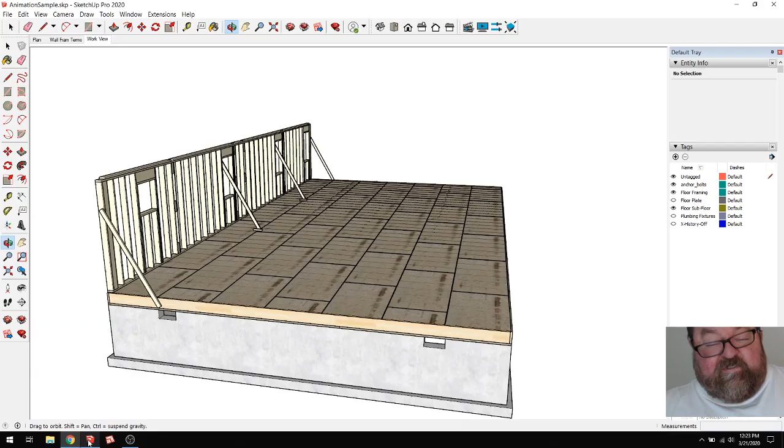So what I'm going to do is go into SketchUp, and this is like a little sample house I had started working on for our apprentices on artisanschoolofconstruction.com, in case you didn't know.

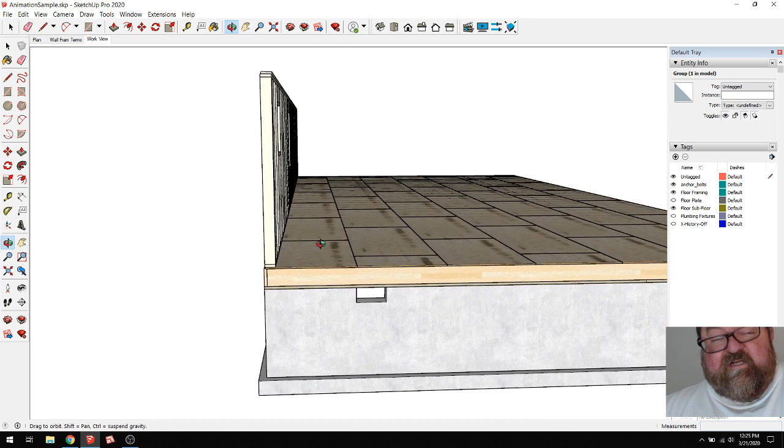But what I'm going to do now is just move this wall bracing out of the way. I want to move it back here 50 feet, and then I'm going to lay this wall down. I'm kind of doing this in reverse now, because in the other video where I show our apprentices how to build this wall, we actually stood it up in that video. So now I'm going to lay it back down.

And then what I'm going to do is take the top plate. I'm going to kind of deconstruct this wall - I think that goes all the way across. I'm going to move it back down to the bottom where it was. Well, it was actually right there.

What happens is you'll pop your line on your subfloor at 6 inches. If you're using a 2x6 bottom plate, you'll snap a line at 6 inches, and that sets your subfloor. It sets your wall back in a half inch for your OSB.

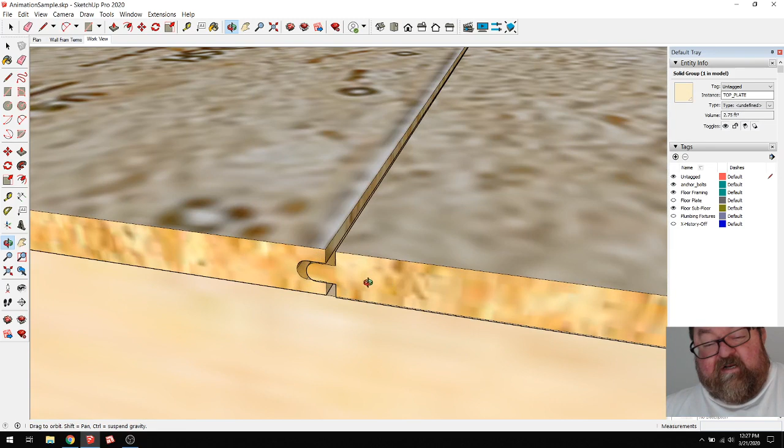Now you'll have to go watch the video about subfloor to understand why this Advantech is not flush out here. I can't review all the videos I've done to this point, but in real life, the Advantech doesn't cover 48 inches. It's got a tongue and groove like this, and it's kind of self-gapping to create a gap so that you don't jam them up.

So in the process of manufacturing, those sheets don't cover exactly 4 feet. So what you end up with is a little bit short, but it's no big deal because you're going to stand your wall up like you've seen before. But what I'm trying to do now is go in reverse of that order.

Now let's see, how am I going to grab all this stuff? Let me turn off some things right quick. We'll turn off floor framing, subfloor, and let's see if I can grab everything from there.

What I'm trying to do is slide everything out of the way so I can start working on this. I'm going to go back in here and unselect the bottom plates. Then I'm going to turn things back on. I'll turn the subfloor back on, the floor framing. And I'm just going to move all this stuff out of the way as if this is what we would actually do. We would kind of lay it up here.

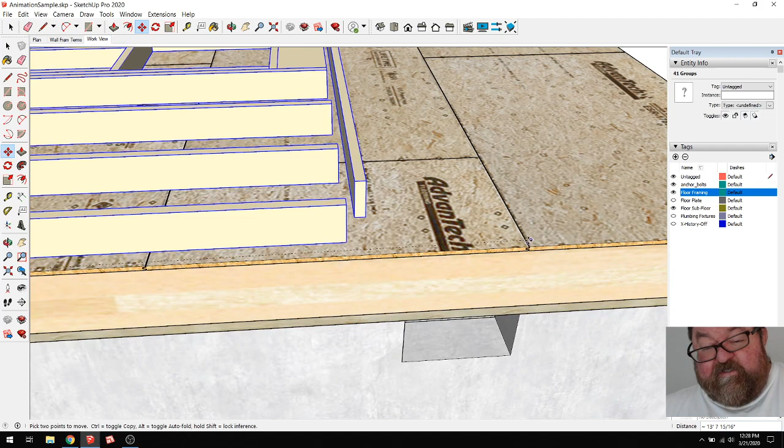I don't want to get on some weird angle. I need to lock that axis. Let's put it right about there. I need that to be an exact amount. Let's undo that, because I just realized when the animation starts, I'll have to know how much I moved it. So let's go 16 feet. That way I'll know.

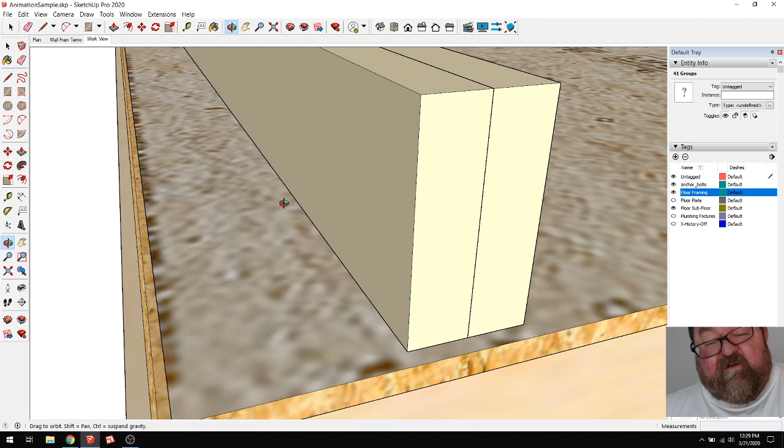So then what we would do is literally we would tack these plates down to the floor, okay? And then the first thing you do is lay out your openings. So what I'm going to do is put myself a reference mark since I'm not on the job site. I'm going to just put myself.

It's kind of funny how sometimes things are easier to do in real life than when you're trying to draw them in the computer. I mean, I could frame this wall in the amount of time that I talk about it. It's kind of funny with my little crew. So there's my reference marks.

So what you're going to do first is put your openings. I've seen some people just start laying out studs. Well, those stud marks can get in your way when you start laying out your openings, and you'll see what I mean in a minute.

So what we would do here, that's the center. What I think I'll do is move these or put one on the outside of each opening too. That'll tell me where my king studs are. And I'll show in a second, I probably could have picked a smaller wall to demonstrate this. I got this big long 48-foot long wall, but I just wanted to kind of give an idea of how the layout's done.

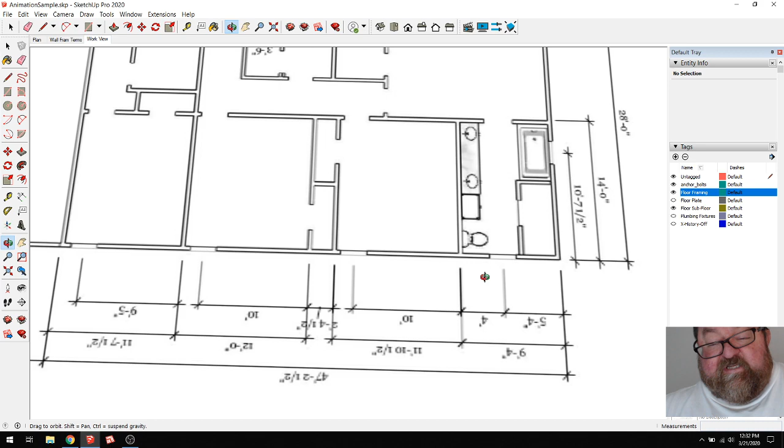But over here we've got our drawing, and what I want to do is associate drawings, two-dimensional drawings with three-dimensional things, so that for our apprentices, I remember when I first started back in 1978, I would look at a floor plan like this and I would say, what does that mean? I couldn't associate this with 3 dimensions because I hadn't built it before. So I remember that, and what I'm trying to do now is help them associate when they see this floor plan what this means in real life. And what it means is this.

So I've got my window opening here kind of laid out, and what I would do is take my pencil—and I won't do all these, I'm just going to do some of them—and I would draw a line here, and then I would draw an X. You'll have to excuse me, this is SketchUp, I have to draw them this way.

And you'll get what I'm talking about. I probably got the X too big there, but I'm just going to go ahead and draw the lines here. This is what I mean by I could do this quicker in real life, because I could have already had my speed square out and marked. But I just want to demonstrate this.

So that would be your king stud. And then let's draw us a little circle. What we would do is draw a little O to represent where our opening is. And that would just be the jack, where the jack goes. And then we would bring that over here. And then that would be mirrored like that.

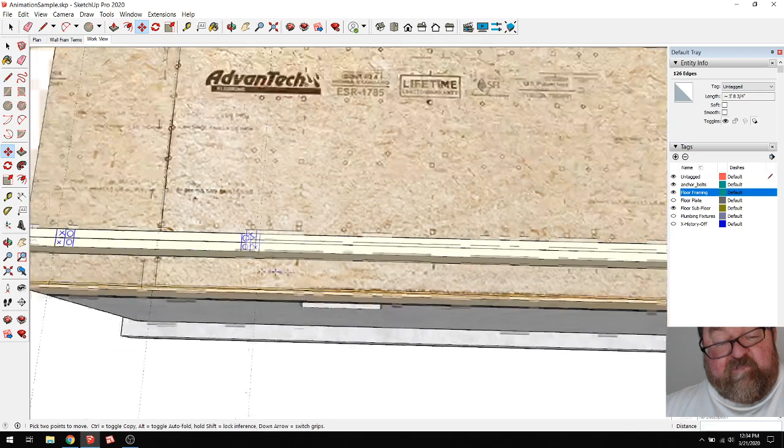I don't think they're all the same size though. They might be actually, because one thing I do, I try to keep these simple houses simple, and we might vary the heights of the windows, but the width might be the same. And that's what we did here.

So we would put all of our openings in first, just like that. And then the next thing you would put in is your T's and corners, okay? Now, somebody might put their corner in first, but your T's are where your walls intersect, okay? So I'm just going to indicate.

Now, I would be doing this on the site with my tape measure, obviously. But since I'm having to deal with this computer junk, I have to put myself a reference line there, and I'm just going to go back and forth right there.

Okay, so now I come down here, and I'm going to copy some of this stuff. Let's see, I'm going to copy my line. And we put one there, and put one there. And then we'd put a T. We'd literally write T. And it would be about that crude.

Okay. Now, some people go ahead and do both sides — and you can do this too. I grabbed the wrong side. Oops. So it would look like that.

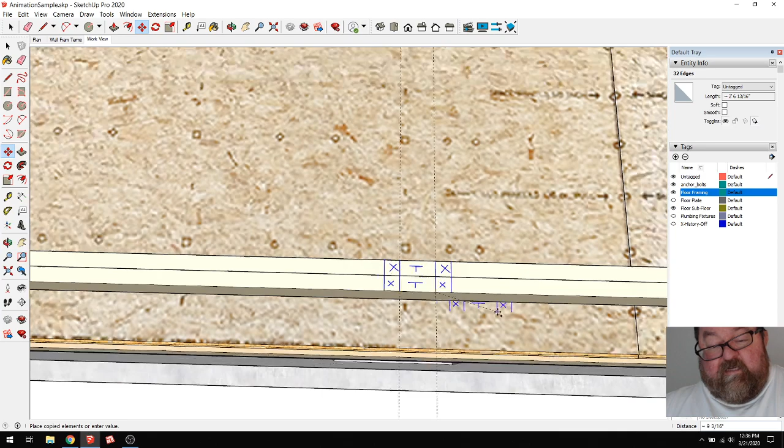But the T would be assembled first and then placed. We would build the T's on the sawhorse. So I'd have a T there, one here. And I think you're getting the point here, which is why we don't put our studs in first.

Thought I had another T somewhere. 1, 2. I had 2 right there. I had 1, oh, right here. Let's skip that one. There we go. So that's how you show a T.

And then the corners are obvious. Sometimes we'll just put a C there. See if I can draw a C. Yeah, we would just write a C there for corner.

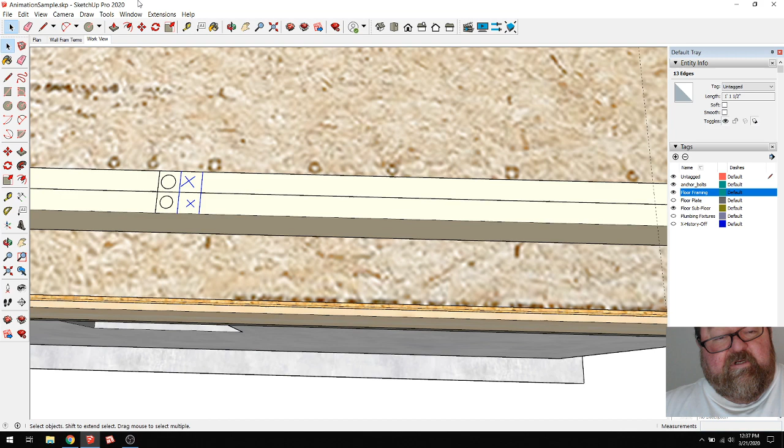So what we would do now is we would measure over 15 1/4, 15.25. And I'm going to copy this. I'll have to delete.

Because we only put a line, some people put 2 marks there, but I like to do a line and an X. Some people will just put 2 marks, but to me, you can see here the X's and O's mean something. You can see that the X and the O start the opening, and then the O ends the opening. You see those mean something. So if I just put X's, if I didn't put anything there, you wouldn't know if that was an opening or not. So I like to do that.

And so then we would just go down, and now is when you start your 16. But you can imagine if I did this, I'm just going to do it 30 times. You can see now what happens if I had laid out my studs first — you can see how they interfere with the layout. And you know, I know I can go through here, but that's going to be a pain. So what you would do is you would obviously skip those places.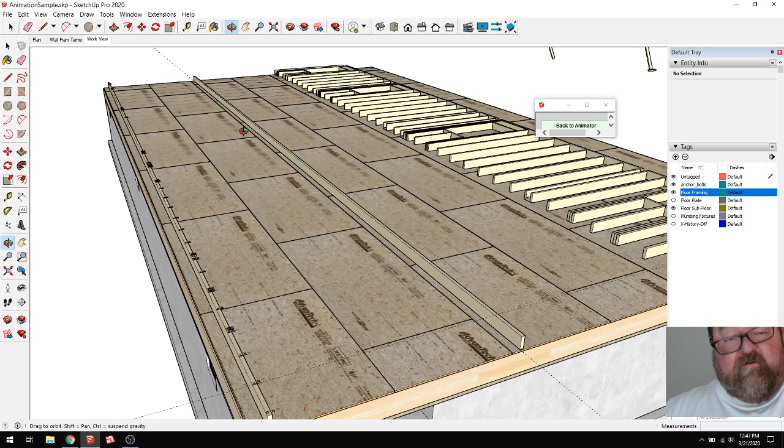Now, what I want to do is escape out, exit temporarily. And I need to get rid of these layout marks because what I should have done was made them a part of that group.

So let's see if I can grab them. I'm going to delete that. I want to delete that. Did I get all of them?

Let's do this. You can change this view to parallel projection and decide which way is that. This way, that way, this way.

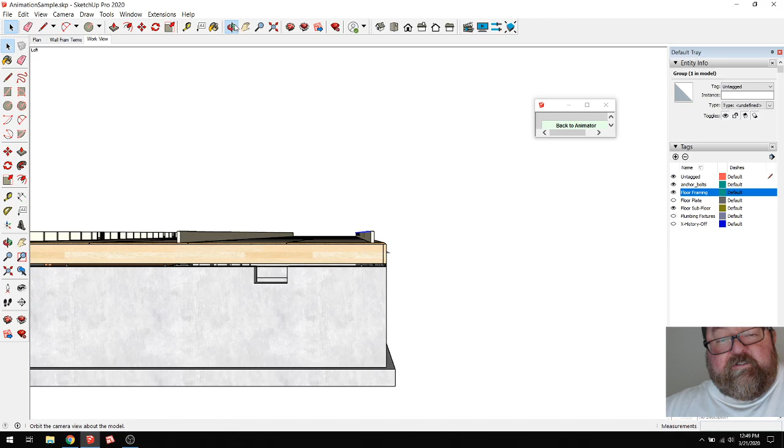Yeah, now I can take that group, let's see, I can cut that, and I can go over here at this group and paste it in, and paste it. Let's see, where can I paste it? I should have pasted it in place. At the end. And right over there.

See if that's 15 1/4. Yeah, a little confusing. That little line right there is not really there. So I'm going to explode that, and now those marks will become part of that group.

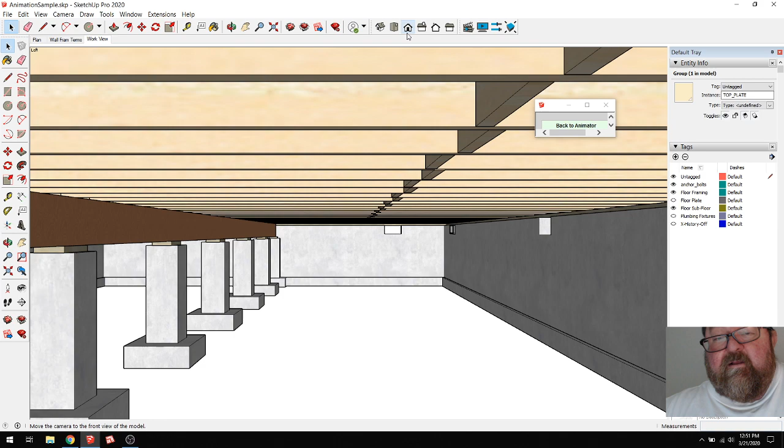So now if I run that animation again, that was bizarre. Let's go up here. Wrong button. Let's see if I run that animation again. Let's see. Yeah, go. Yeah, now you can see my marks go with it. And this is why this prepping, I said prepping.

Let's exit this and say yes. I want to do the same thing, and this one should be easier to move.

Look at them all. Yeah, it's good. Got lucky that time.

And I'm going to cut those. Then edit this. And paste in place. There we go. Now that's part of that group.

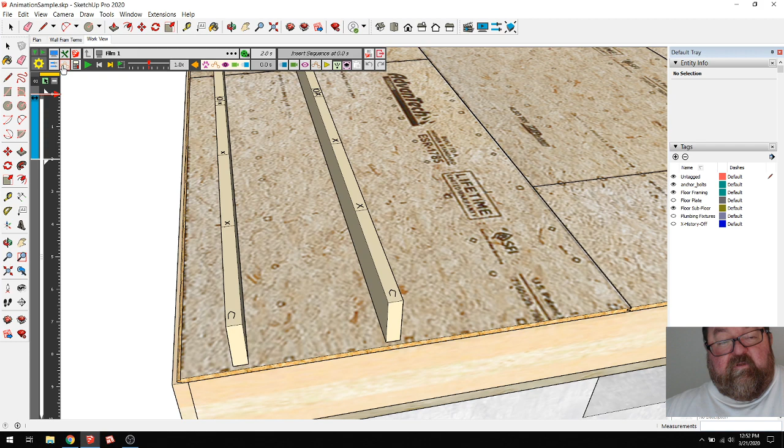Alright, so now let's go to here. And let's run our animation. There we go.

Now, let's exit that. And let's see if we are set up. First of all, let's move this back here. Then we'll move it 92 5/8, because that's how long a stud is for an 8-foot wall.

Okay, so now what I would do is, finally, let me see if there's any other questions. Nope, I think I bored people to death. It's okay. In the end, the animation's going to look good, I promise.

So now what would happen is, in the same manner that we laid out our openings first, we would install the openings, the jacks, and those openings first.

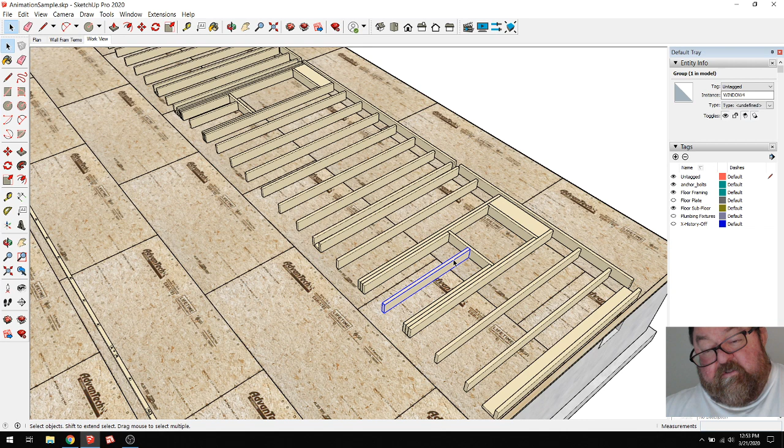So I don't know how much of this, I think I'll just grab that whole group. Is that part of the group? Yeah, what we'll do, I'm going to make a group out of these openings. Okay.

And it's a little bit difficult because I'm having to think about how the animation plugin works, and also how SketchUp works. So let's go back and we'll start another motion, another thingamabob, and we'll select our group.

Now I thought I had created a group out of that. You see, temporary, yes. I made a group there, so why is it not selecting? Okay, so if I select this group, that group, okay. And then I say move, and I said 16, oops, okay.

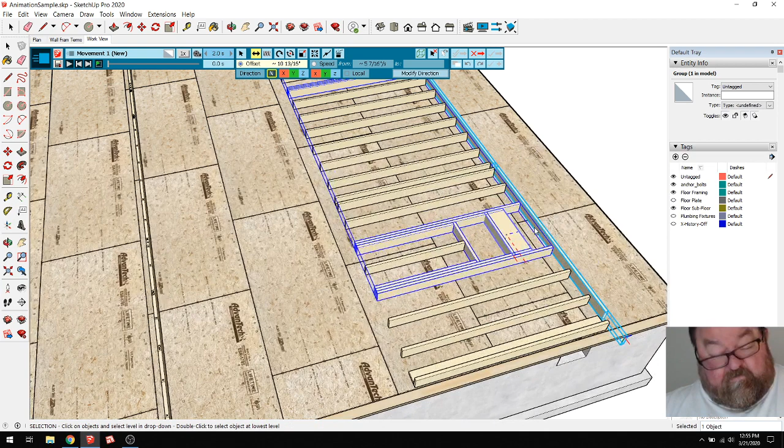This may be something I have to practice on because what's going on here is there's a lot going on here that you can't see. I'm going to undo that. We're going to exit this. We're going to exit this whole thing for a second.

So what's going on here is that I have an extension that builds walls, okay? And so I can just come out here and build a wall. Right? That extension itself is putting things in its own groups.

Okay, I'm going to delete that. And this wall is one of those. So I'm having to deal with that extension and this plugin and the way it's working. So this may be a little more difficult than I thought.

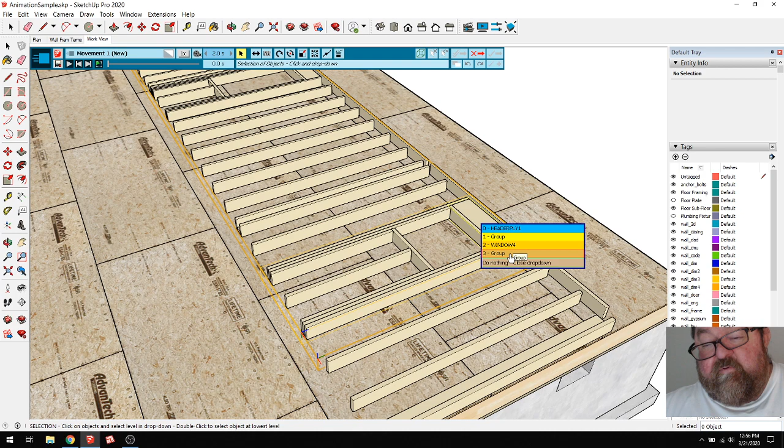Let's start this back and I'll see if I can't start a new movement. And I'll see if I can't select, it says group window. Okay, let's see, group. There it is. I just have to select the right one, okay.

All right, it's just a matter of education. And then I want to move it. And I moved it 16 feet. So let's see if I can move it 16 feet.

Well, I don't need to do that. I know where it goes. It goes, need to lock my axis here.

Okay, so if we were looking at our animation up to this point, it's a little mixed up because what I'm going to have to do is go in and fix my groups. What I really wanted to do was show the jacks coming down first, then the headers, then the cripples and the sills, but that's going to be more difficult because I'll have to explode all those groups.

Let's just see for the fun of it what that would look like. Okay, so we got to put this back down here. That's funny.

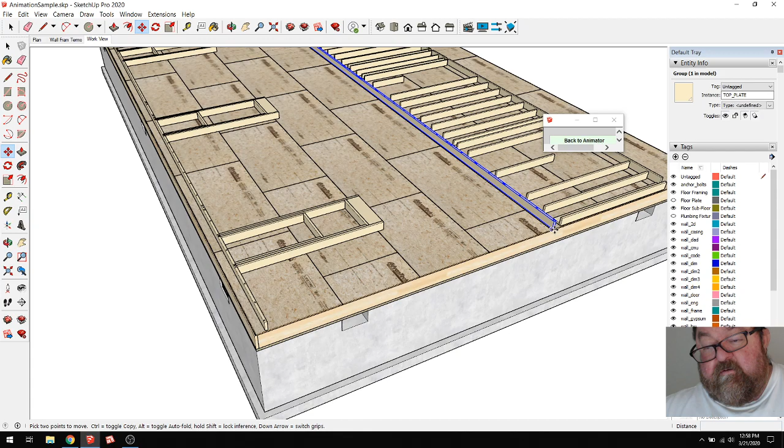I just got this extension for this animator plugin for this animation thing just a few days ago, so we're going to see. I'm going to have to learn how to use it here. I'm starting to understand that you can't move things around because it's relative, the movement. Let's move this back to here.

What I'm going to have to do is split this animation up into clips, which makes sense, because if I ran the animation now, it keeps wanting to move it back to there. This won't stay here. Let's see, which one is this? Put that there. Now if we ran the animation.

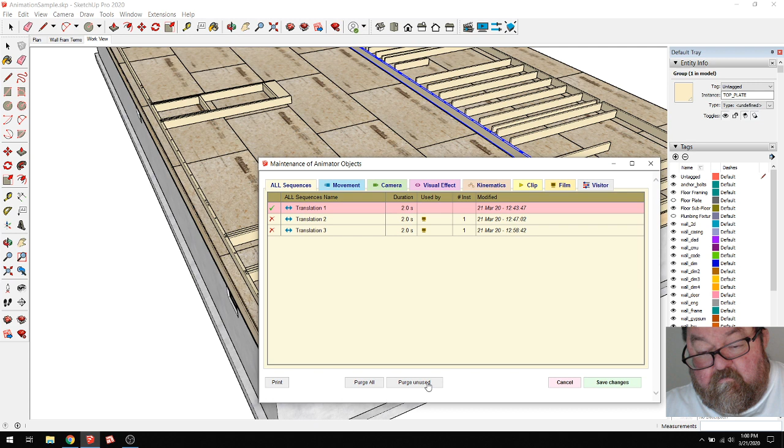Okay, so what I'm going to have to do is actually... I have to purge. Put this back. I think what I was trying to do is put it back while I was inside the animation instead of inside SketchUp. So let me see if I start now. If I do it now, yeah, now it's going to work.

So that plate moves out and then the openings come in. Okay, so now we're getting somewhere. Let's play that again. You move your plates up there, and then you slide your openings down. And then what you would do is move, then you would bring your corners down.

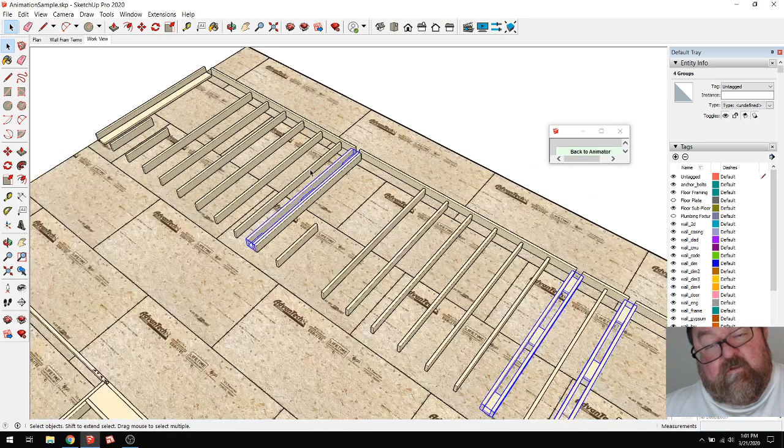So what I need to do is exit this, temporary exit, yes, and make a group out of my keys. Because that's what you would do: you would put your windows in, your headers, your jacks. This is your king stud, this outside stud. Your jack is here, your header, your jack, your king stud, and these are two cripples that go on either side of your window opening.

You slide your bottom part of your window opening in. And then we typically don't put these in - we typically just put our headers and jacks and trimmers and king studs in. Then, after we get the roof on, say it's a rainy day or something, we'll come back and put our cripples in. But it just depends on how the workflow is going.

Make group. Okay, so what I really need to do is make my groups. If I was smart, I would make all my groups. Let's take these corners and put them in the group with the cut. We'll paste them in here, and then we'll make all of our studs a group. Actually, and the cripples too.

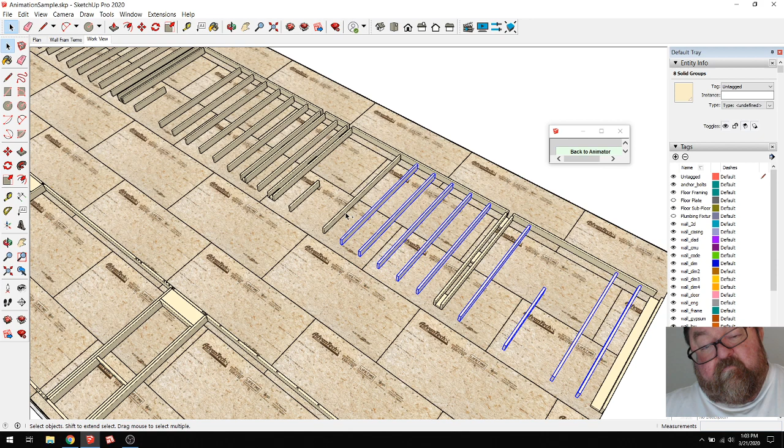Oops, didn't mean to click on the subfloor. That's a stud right there. All right, we'll make that a group. And then we will make all of our double top plates a group, which would be the last thing that you nail. Oh, I've already got them grouped - that's good. Your double top plate would be your last thing.

So let's see if I can just go back into my animation now. Back into Animator. And what happened to all my stuff? What in the world? What in the world? What in the world? What happened?

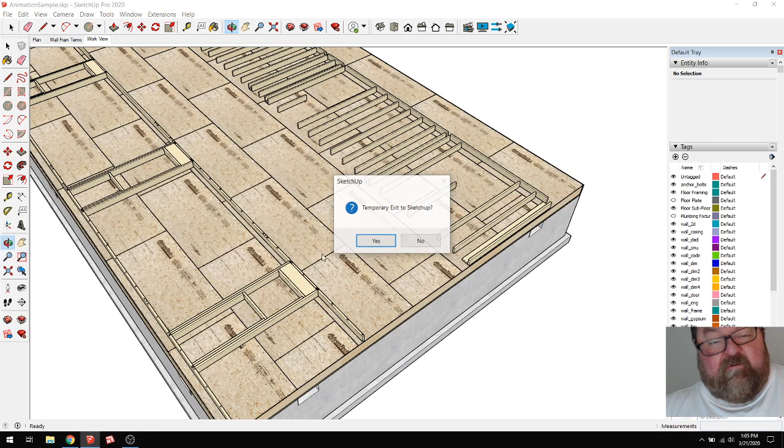I just hit undo, temporarily exit. Let's just exit from this software altogether, because now it's kind of scary. Let's see, am I out of it? Yep. That doesn't make any sense.

But I didn't lose my group, so alright, that's good. I kind of freaked out there for a second. You saw how, for some reason, this stuff moved back and the studs were gone.

So let's go back into this plugin. Now it's kind of funny because this is the brand new version of SketchUp, and this is an older version of this animator, so I'm not really trying to...

So anyway, getting back to the sequence, let's see, is this group? Yeah, that's the whole group. Okay, now I'm going to move it down. Oh, I got to push my little button here indicating if it's a movement or not, or what kind of action it is. Then it's going to come down. Should be on the layout mark right there, and that would be another action.

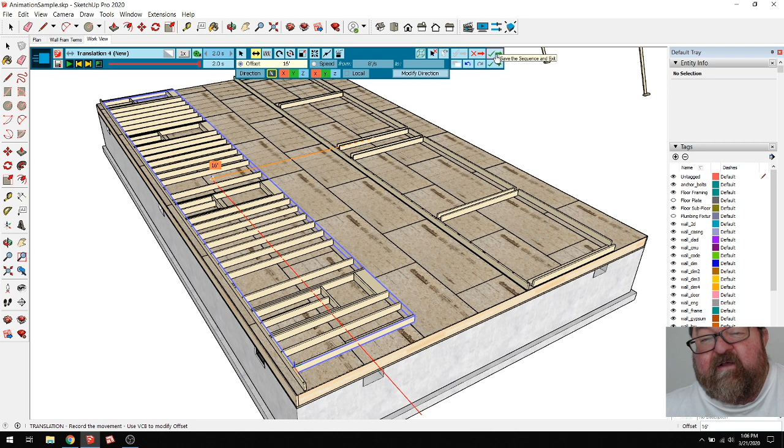Actually, we were supposed to do our T's first, weren't we? Well, we can change that. I'll show you how we can move these around. Okay, so let's just save that, and let's see what order we have these in.

Okay, so what's happening here is I'm getting it now. These, everything has to be where it started out to begin with when you start the animation, which makes sense.

So that means that, let's exit, and that means that this group has to go all the way back. I was leaving it where it was. So things have to be just back. Well, I know it was 16 feet, so I can just move this back 16 feet. That's kind of funny, I didn't think about that. You would think it's not like it's recording it and putting it back where it was. It's these objects are where they are, and it's just moving them.

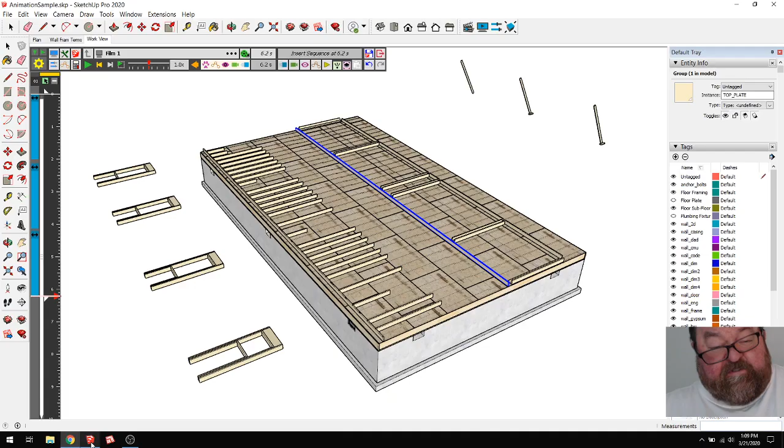Okay buddy, that sounds good. I'm just kind of playing around with this animation plugin, and trying to figure out how to. I think I probably bit off more than I could chew on this first part.

I probably should have kept it to something simple. But that would be... why did I copy those? I meant to just move it.

So if I save that, that's where we started our animation, I think. Our studs are coming down. There we go, that's working. Okay, that worked fine.

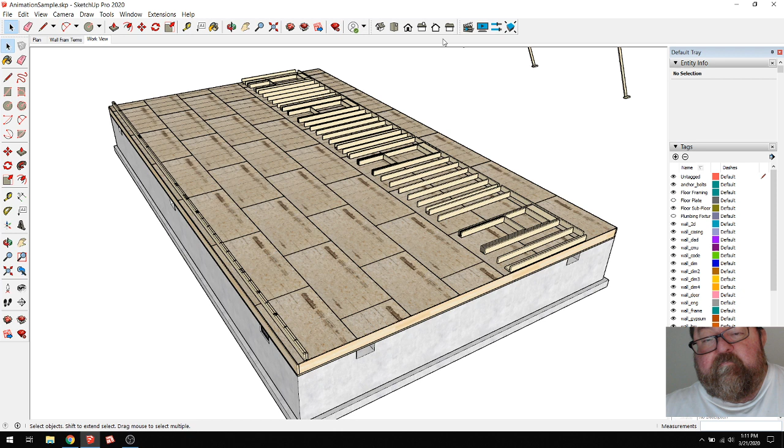That plate, this thing needs to go up here at the top. So how do I slide that up above? Let's see, let's do that over again. The plate's supposed to go up first, and then... I want the plate to go up first. So if I go in here, what determines the order of these?

Can I move these around? This should go up there. Yeah, let's try that. Oh, wait a minute. That one needs to go away. That one needs to go away. This one needs to go away.

So why can't I move this one? Oh, you just have to do it like that. Okay. Let's see what that did. Okay, that's what I want.

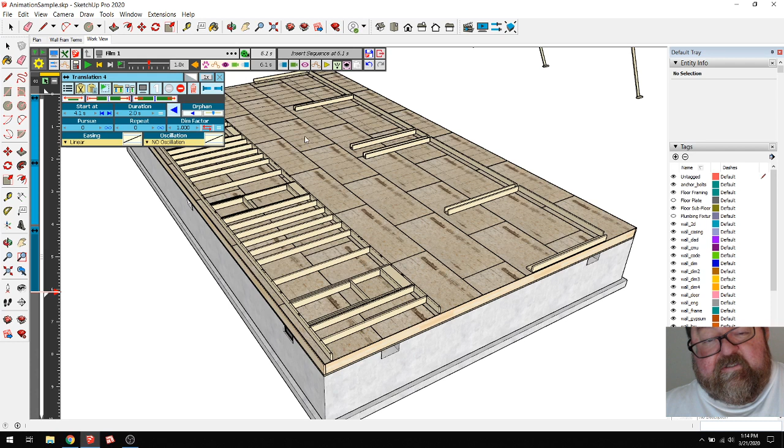Great, now we're cooking with gas. And actually what I'm going to do is I'm going to slide these corners. You would actually, let's do another one, another movement.

And we would pick our, let's see, this group, we would move it. I'm getting the hang of this now. And this would come down 16 feet, like that.

And so all we have to do is save that. And then that should be in the proper order, except that goes up, openings come down, studs come down, and somehow this stud is not in.

Let's go out here. Let's cut this. And we're going to paste it right here. We're going to paste it in place. Oops.

Is that right? Yeah. Now if we go back to our animator, we move our top plate up, we put our openings in. I still want this to be down here and this to be up here, like that. Like that, let's try that out.

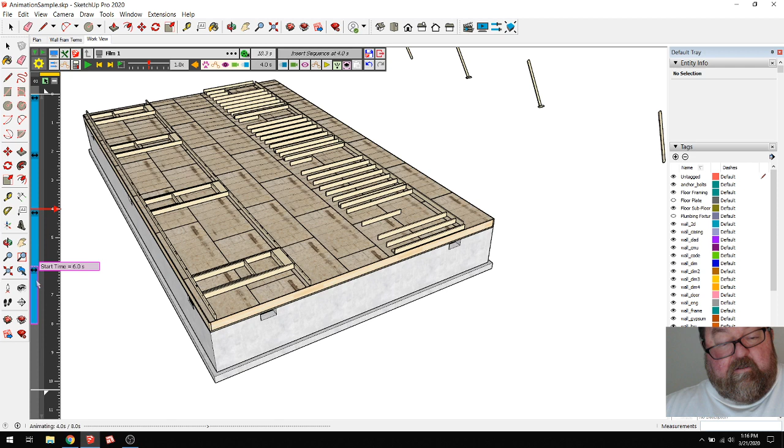Plates up, openings down, corners and tees in, studs in. All right. Now, what we would have, after we get all of that in, why am I missing a stud or a T? Something's funky. Let's go out here and we'll save this.

Yes, and my T's are missing. This is one thing that's going... oh, there they are. Oh, there's a stud missing right here. Bizarre. So anyway...

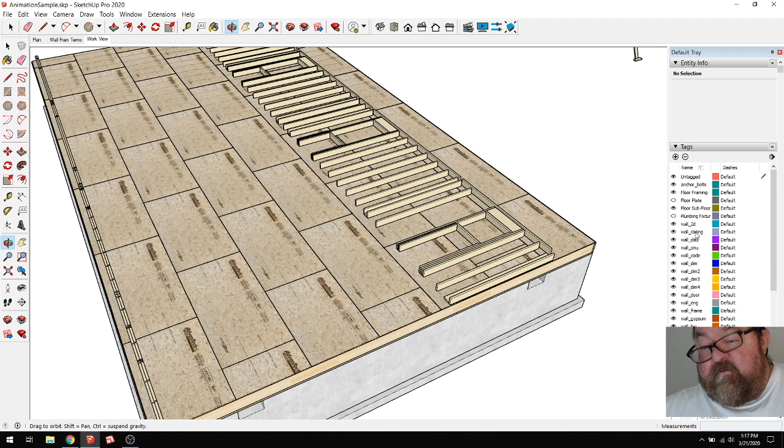Let me refresh. Can I refresh this? What happened? What is going on? If I just hit undo, what happens?

I've never seen this behavior before. Somehow SketchUp is recording all those movements. I'm hitting undo because I'm trying to figure out what happened—some of my framing got deleted.

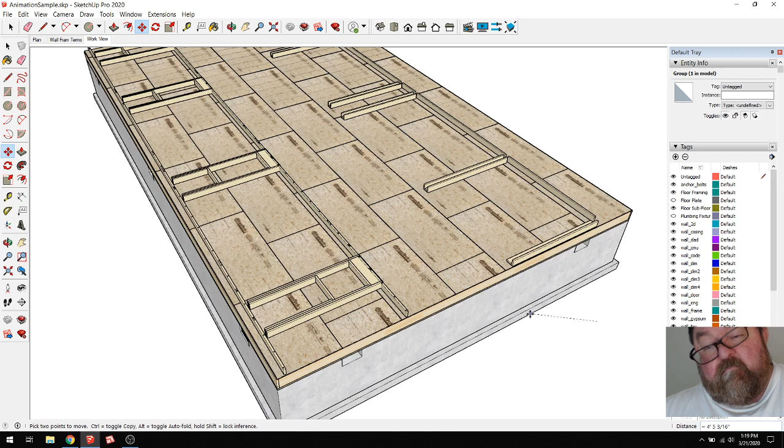Let's move this down 16 feet. Or, wait a minute—let's move this back up 16 feet, and we'll figure out what's missing.

Somehow, what is going on? The opening is supposed to be—those layout marks are actually right. Somehow this group got shifted. There we go. So somehow that's odd. That's very bizarre, very bizarre.

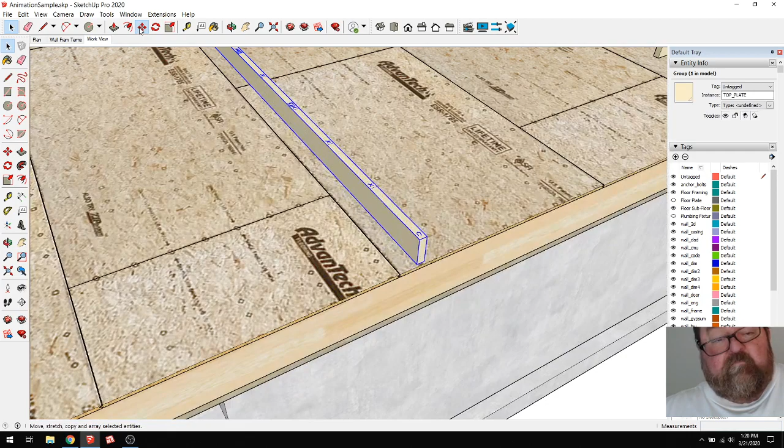I'm sure it was my fault. So then if this was back down here, can't leave it there—it'll move it back up again, it'll move it farther. This is where we wanted to start our animation right here.

Let's see if I save this now, because I don't want to lose my wall framing layout. Let's save this. And we go to our animation, and we start it. Yeah.

Except it went back to there. Yeah, I wanted that to go up first, and then that come down. Okay, and then we lost our corners moving, but we'll do them next. Let's see if I have any other questions.

Okay. This may seem kind of boring, but in the end I'll have just a reference in the video that this ends up being. I'll have a reference that just shows the animation, which will take about 30 seconds but about 2 hours to make. Let's see. But I'm trying to see how this old animator plugin works with the new version of SketchUp, and so far it seems to be working fine.

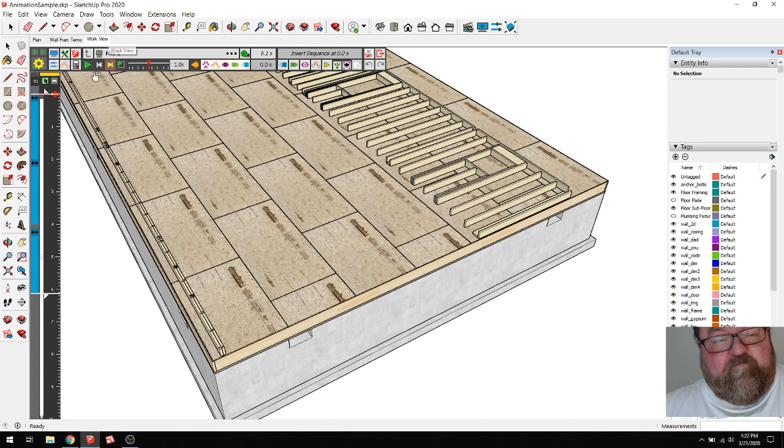I didn't save. Yeah, I need to add in a new movement, and I need to pick this group, and I need to move it down 16 feet. And save that—I might not have saved that one. Okay, so...

Now they're out of order, but I can fix that. So I want my plate to go up first, and then—I see what's happening now. This is the timeline over here on the left. So I gotta figure out which one is which.

Let's move this up. Let's see. Maybe I'll get lucky and I do the right one. I did—that's my bottom plate. I want it to go up. Then I really want my openings.

I want this one to go up. And then I want this one to come up here, like this. And that. And that.

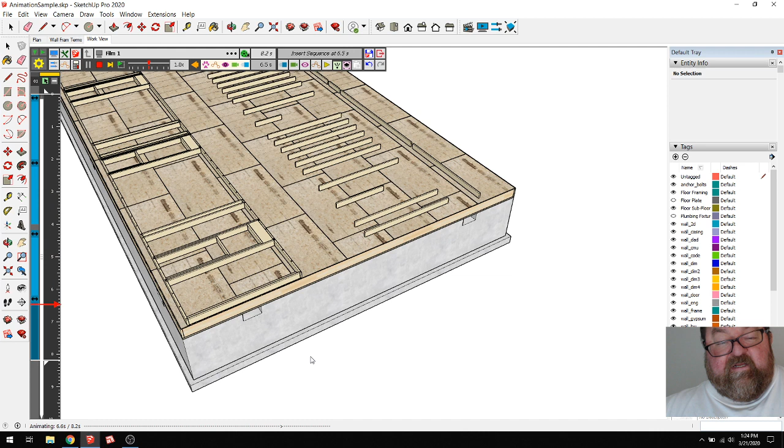Plate goes up, openings come down, corners and tees come down, studs come down. We're getting there—we're almost there.

Now we need a new movement of—after all this stuff is in the wall, the next thing you do is you take your double top plates and it'll go on top. You'll nail it on top, and I'll show in a second. That's 16 feet. And we'll save that.

It's just trying to figure out where—yeah, to make sure I'm in the right place in the timeline when I do these things. It's probably good there's a place mark, a mark where I'm supposed to have it when I start the movement. Let's see if that worked. Top plates out, put your openings in, put your corners and tees in, put the rest of your studs in.

Put your double top plate on. Marvelous. And let's save that. Let's exit and we'll save. Yes.

Marvelous. Because what happens is you'll cut your double top plate—it cuts out for your tees, for your walls to intersect. See? So wherever you have a tee, you'll have a gap in that double top plate. The top plate's already down. That was part of the animation.

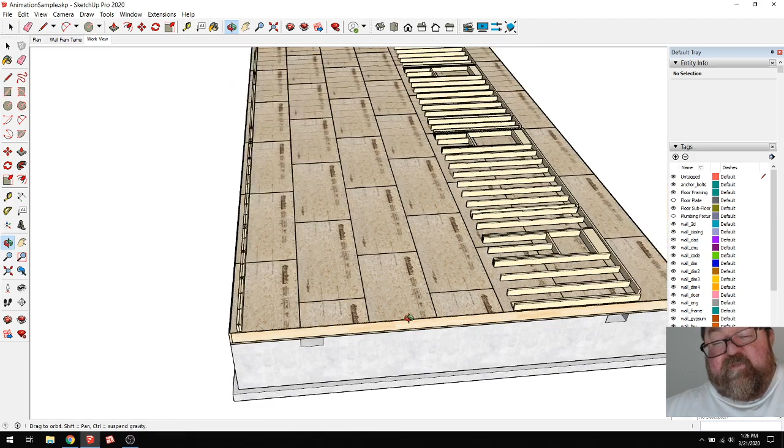The top plate is here. It's going to move out. You're going to put all your windows and doors in, and your tees, and those really go in at the same time. The point is that you put all your components in first—your openings, your tees, anything but studs. Okay, your studs go in last. And then you would take your double top plate and nail it on.

And then once we're all together, we're getting ready to stand the wall up. But let's run—let's see, what does that mean? How are we going to do that? Because all this has to be together.

I have to run the animation just to get this. This is where it gets a little complicated—not complicated, I guess, because I'm making it complicated—but I have to run that up, run these down, run these over, run that down, and run my double top plate on. Now I have to select all this stuff. How am I going to select everything? That might be the screw up. Let's see if I can do it. I wonder if I can select everything.

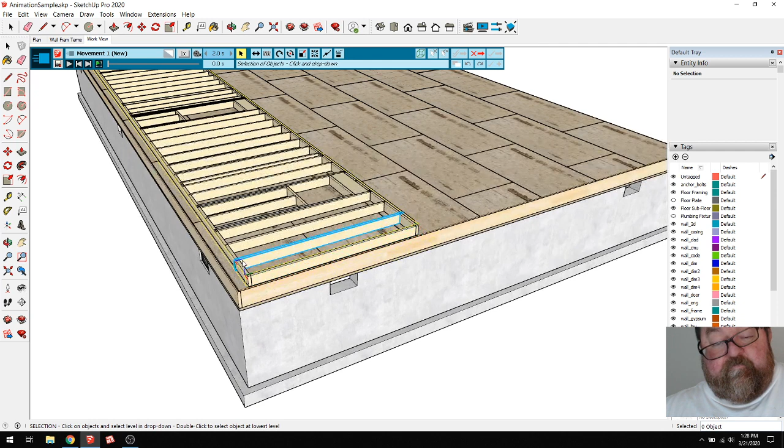Oh, dang it. I wonder if I can cheat and now select and make all this a group. Can I cheat

and make a group while I'm inside this thing? I bet I can. Now if I go back, oopsie, yeah, that was odd. They put it up here. Oh boy.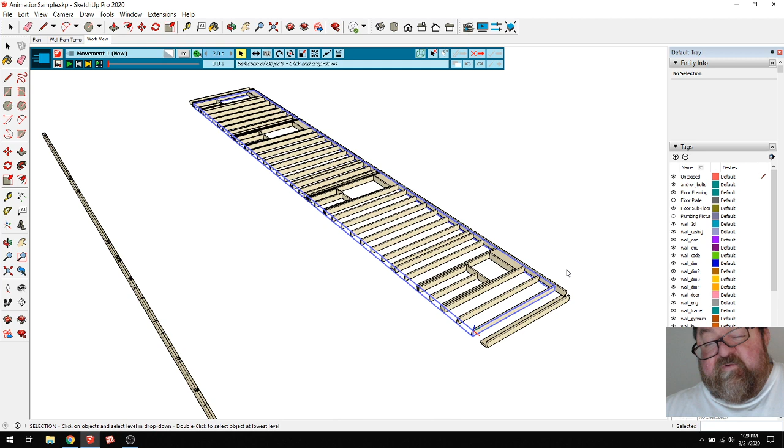Can you undo while you're inside? Back to, oh man. Oh man. What did I do? This is, okay, so it moved it up here for some reason. Oh man. Oh man.

Let's, let's explode that group. Now, if I go back to this, all right.

Now we're, tragedy averted. The problem is what I need to do now, and I'll probably have to make two separate animations, and this is what I was talking about earlier. Now I want to raise this whole wall up, but I don't know how to select all these things. So I may have to figure this out.

Yes, back. Okay, so select mode, select one or several objects. Okay, how do I select? Do I use the control key?

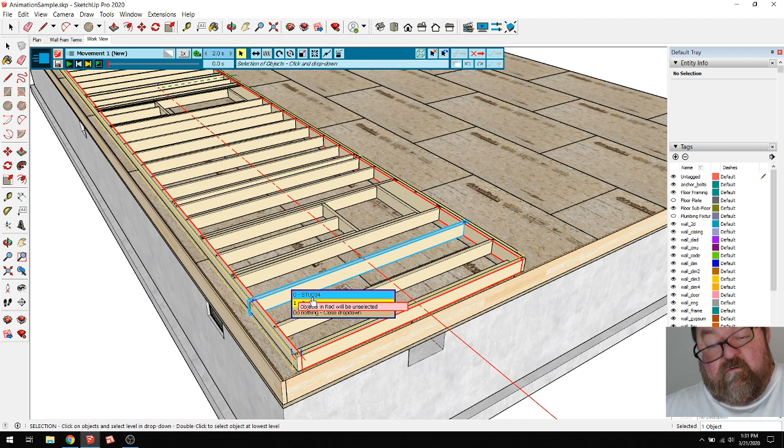Objects in red will be unselected. You select, click, and drop down. Select of objects, selection of objects, click, and drop down.

Yeah, but let me exit that, and we will start a new movement. And before I want to touch the control key.

Objects in red. Let's quit that. Let's see if I've screwed up my animation. Let's go out of this.

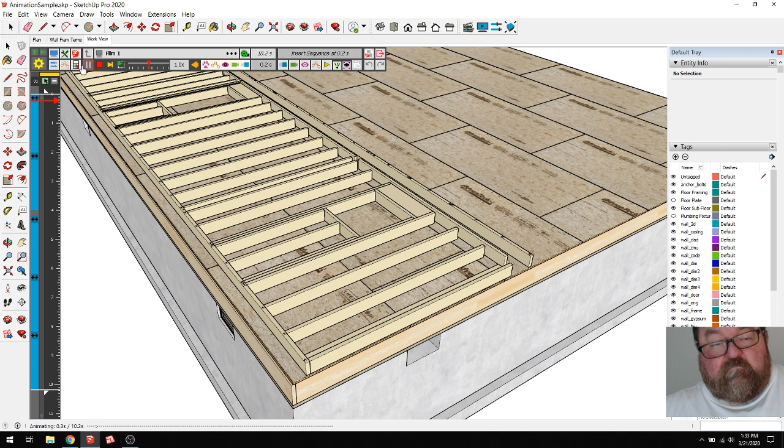Yeah, I gotta put everything back.

All right, well, it's apparent to me that I don't understand how to select. If I go into this and I choose a new movement, if I just start here, I select group, okay, that's one group. If I hold the control key down, group, am I selecting all that? Group.

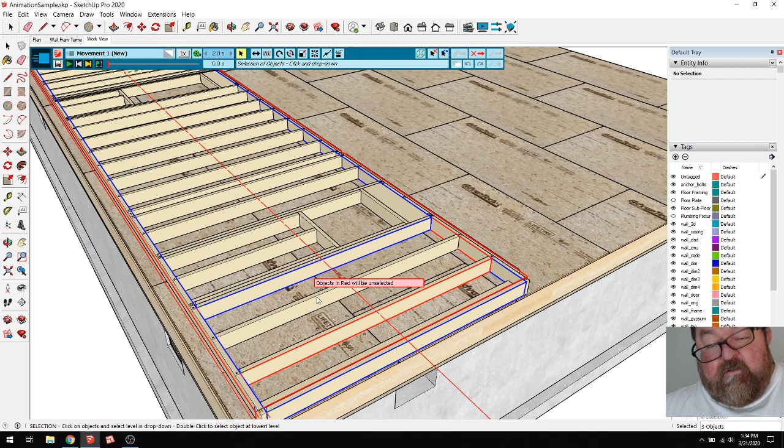How do I select? Now see, if you were me, you would sit here and think, okay, I'm select. It says, alright, so let's just pretend that I have, I don't know what this red line is out here.

So, what I'm going to do is I'm going to choose rotation. And this is, I mean, the point of this is I want to show standing the wall up now. So I'm going to start, oops, shoot. Right here, and I didn't get my bottom plate.

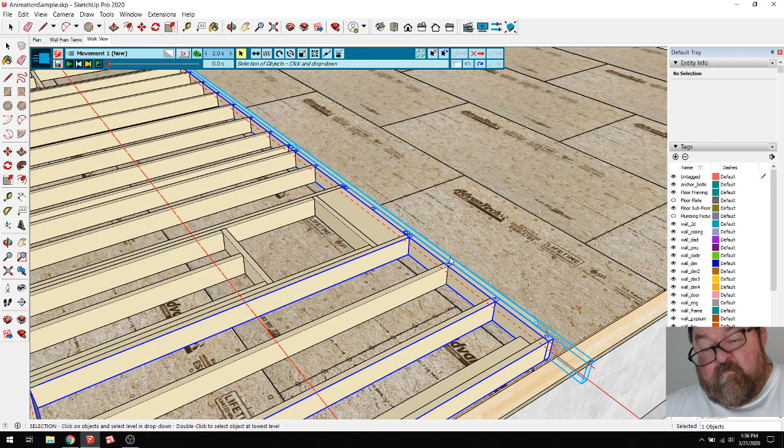Well, did I get lucky? No, I didn't get my... I think I'm getting it. I think I'm getting it.

Then I go back to my movement. I didn't realize there was this much freedom to go back and forth. And he got it, folks.

Except that, why is the top plate up in the air? What is that? What is that? What is that? Why is the top plate way up there?

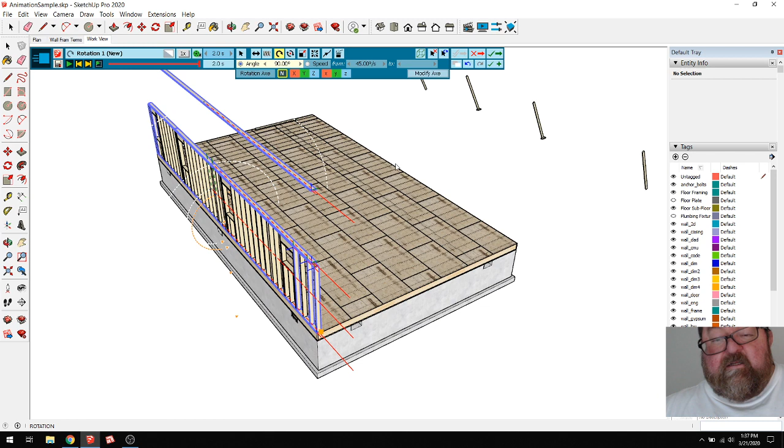Well, what I may be able to do is fix that. Let's just save that for now. And let's see what it's doing. Okay, it's moving that.

It needs to be laid down. Now it's going to rotate it all over. Yeah. We need to get this up here. Oh, that's my rotation. Which one is it?

Okay, so the rotation one needs to be down at the very bottom.

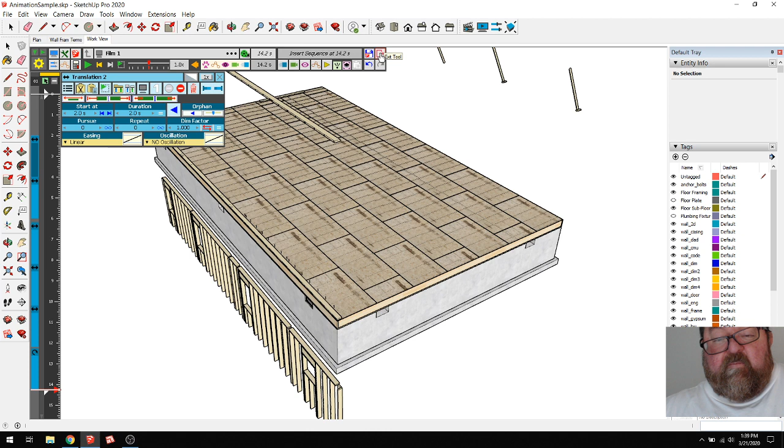Yeah, I think I get it now. So everything needs to be, that's going to work, I think, if I get everything back where it was. Which means all this has to go back.

16 feet. 16 feet. Could have selected it all, I guess. I was trying to check my groups as I did that.

Still don't understand why this top plate's acting funky. I have to figure that one out. I almost forgot about my bracing. It's been sitting out there all by itself all this time. That would be the last thing. I think I put it at 50 feet back.

So if I just go and I run the animation now, oh, forgot to put my top plate back where it was. Yeah.

Actually, if I get that top plate in the right place, yeah, that's what it was. That's what it was. This top plate is supposed to be down here, obviously, when we start, and it wasn't. Alright, let's see what that looks like.

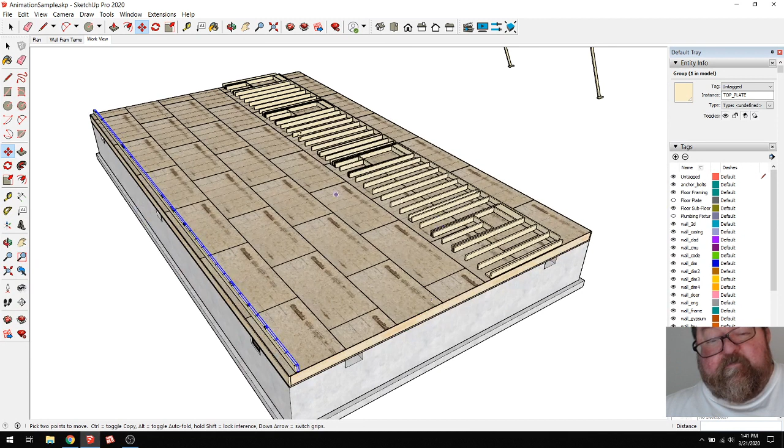Yes, Jesus, thank you, that worked. What about that, is that 90 degrees? Why does the wall look like it's sitting at an angle? That's odd, let me check it. It's probably just me. Oh, wait.

Let me go out of this and save everything. That should have saved everything. Oh, I didn't do anything.

That's right, so let's run the animation. And I'm going to get rid of that gap. There goes our openings, our T's and corners, our studs. We put our double top plate on. We raise the wall up. Now, then we do our...

No. Wait a minute. I need to do this without screwing up. So what I'm going to do is run this and then just grab the, I'm trying to change the angle.

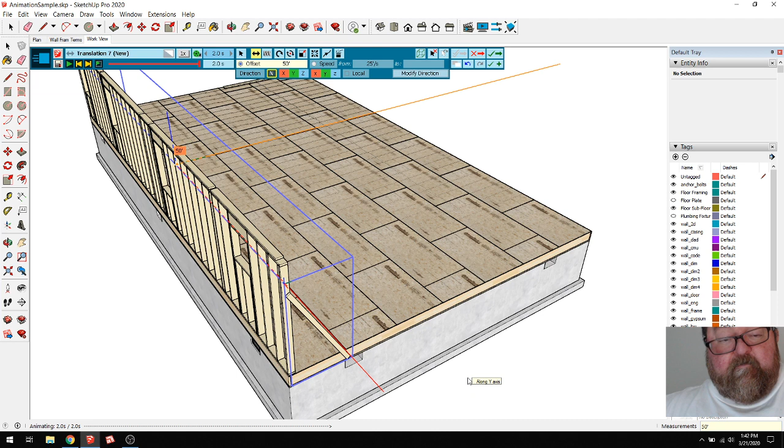Alright, so what I'm going to do is create a new movement, and I'm going to select my bracing group, and this is going to be easier. I'm getting the hang of this now. And I'm going to move this all back 50 feet because that's where it was. And save that.

Now, am I out or not? Temporarily exit. Back. Okay, alright, now, so if we are, can I change my angle?

Yeah, so what I would do is I'll talk about TV camera angles here in a second. Let's get this to where, if we were trying to show some students how this would work, we would tell them first let's run our animation.

Yes, I need to get, there we go, the little screen's not popping up. I need to get this out of the way. I wonder how I can get this to where it's not so much in the way. Anyway, cancel.

Okay, so students, you're gonna take your top plate and move it out. You're gonna put your, I need to slow this down. Put your double top plate on, raise the wall up, and then you're gonna brace the wall off. Okay? And that's cool, that's cool.

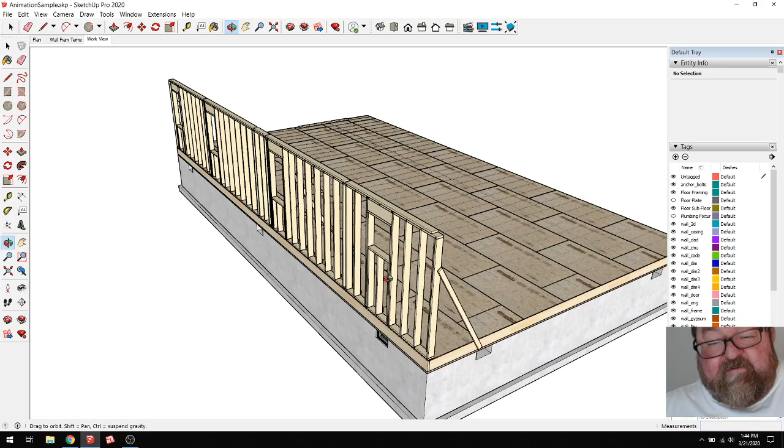Now all I have to do is set up. I think my eyes are going nuts on me. I was trying to see why the wall looks like it's leaning. And I don't know what those marks are right there, what that line is. But anyway, I'm not going to complain at this point. Got this far along.

So, yeah, so what we can do now is, I think we can place a camera angle, like we can start the animation in kind of close. If I can get back to it.

And let's see, where's my cameras? Insert a camera in the timeline. Okay. New camera. And capture current view. Okay.

So I guess what we do, where do we want it to start? We want it to kind of start off kind of close, so they can kind of see moving that plate back. So...

No. Okay, how do I insert it? Oh, save. Capture. Okay.

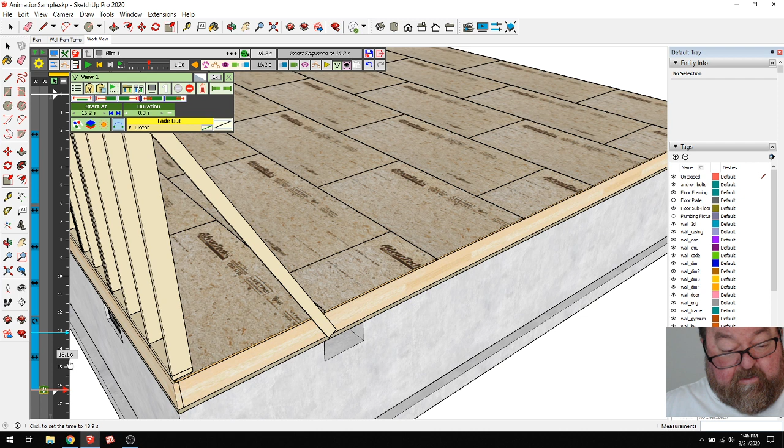There it is, okay, so where did that camera go? There it is, we're going to put that camera up here. Okay, now, as we want it to move out, I think...

How do I, can't keep, yes, and then going back. It's a little buggy, but it's fine. I'm not going to complain.

Insert the camera, I want to insert another new camera, and I want it to be back out here at this point, so we're looking at the whole thing. So capture current view.

And save that, and that view, I think, is that the right one? Would be down here somewhere. No, that was the close-up one, wasn't it? This one was down here. Okay, now we're going to have this up-close view up here.

And then as we come back, let's put, I think that's what I need to start doing. When I start to do something, I need to make sure I'm in the timeline where I want it to be. So now I want a new camera angle.

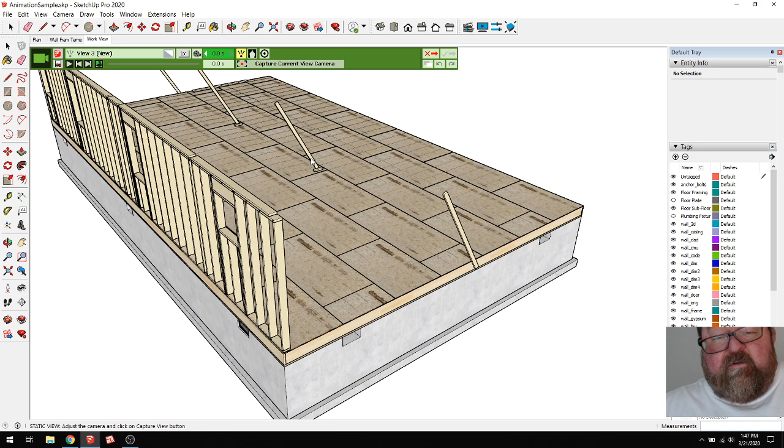I want a new camera angle that I want to kind of be on the back of the wall when the braces go up, like this. And why do I have to keep doing this to get the window back up. I don't know why. Capture current camera, okay.

And then save that, and that should be down there. So if I run the animation now, it should start in here. The plate comes out, that goes down, those come in, studs come down. We start to move around, the wall rotates up, and the braces come in. Yay!

Oh, all that. Now we're going to save this to make sure. Save all data, yes. Let me see if I have any questions.

Now, I know that was very boring. I lost all my current viewers, but it's okay. It's all right, it's okay.

Now let's go back and we're going to export. We're going to generate a video, see how it looks, and make it an MP4. Where does it go? It goes to Animator Videos, to Artisan Construction 2020 Projects. Yeah, okay.

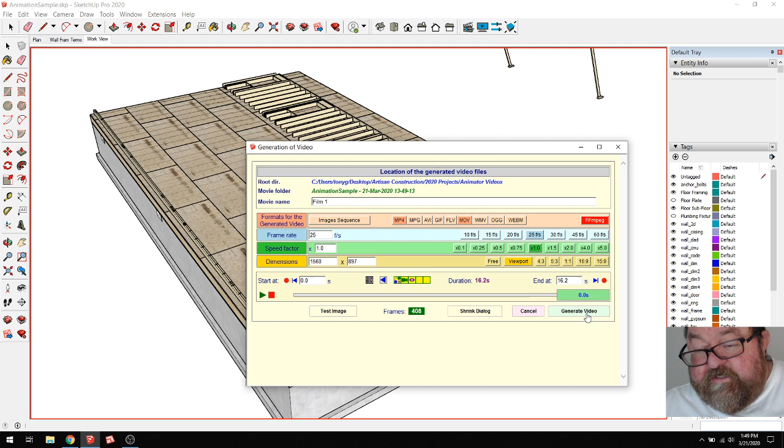All that looks good. 25 dimensions. Viewport, okay. And then generate video. Let's see how long it takes. I'm probably going to change this where it's kind of zooming in at first.

I don't know, or I can edit once this is a video - I can edit that little video. I didn't know it was going to take this long. This is the first one I processed. So we will kind of check the comments without screwing it up.

There goes our plate, our bottom plate with our layout on it.

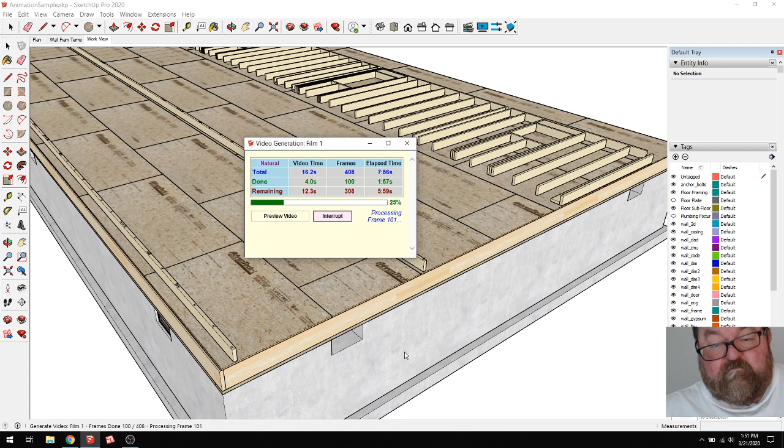This is going to take more time than I thought.

But you can see how involved just making an animation for something like this is, especially if you're just learning the plug-in. That Animator plug-in's a whole other software, basically running on top of SketchUp. So I hadn't even really played with it, so it's a little more complicated than I thought it was going to be.

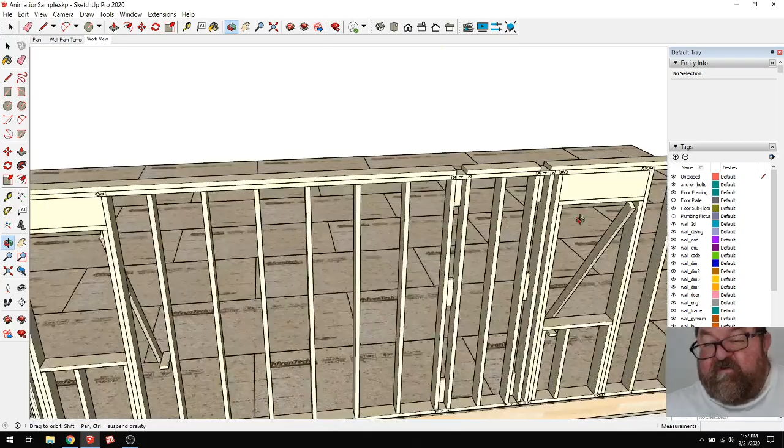But yeah, and then you wouldn't let the braces stick out of the openings either, because you don't want those to be in the way. If for some reason you didn't put your OSB on, you don't want your braces sticking out of the opening or past this corner, so that when you start putting your sheeting on the outside of the wall, you don't have to go start knocking braces off the wall. Because these braces, especially these interior braces, will be semi-permanent until even maybe right before the drywall gets put up.

So let me see if I can find that video. Where did it say? I was going to put it in my animator videos.

Ooh, it actually created a - oh my gosh, wow, it created a frame. These are all the frames, so I want to go delete those. Wow, I didn't know I was going to do that. Delete, because I've got here's the MP4 right here.

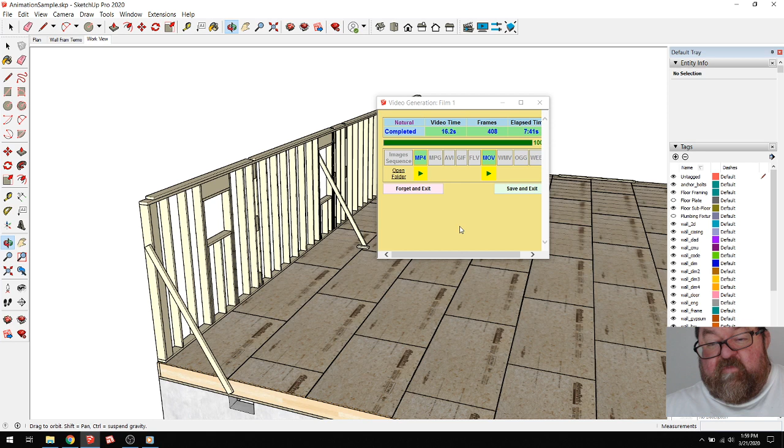Let's see. Completed 408 frames, 7 minutes and 41 seconds to do that. Save and exit.

Here we go, so we want to save that. And I guess the bad part - and I guess I'm glad I created a separate file - if you look up here, my file name is animation sample. I was smart enough somehow to create a new file for this animation, because now basically I would have to create a new SketchUp file for each wall. If I was going to animate this entire house, which would take me a while, a week maybe, I would have to have - because I can't build the walls - it would be a task.

That would be a monumental task, because everything would have to be done in a perfect sequence, which means I'd probably have to create separate videos and then take those videos. It created an MOV file—I didn't think it was going to do that. I'm going to delete that sucker. But that's pretty cool, let me see if I can get this over here.

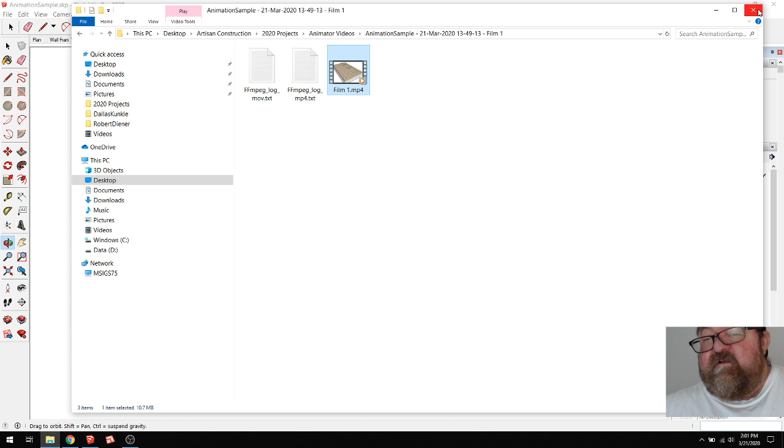That is a lot of work for that, but it's worth it, I think. If I can talk this company into hiring me to help them, then it'll probably be worth the investment of time.

So anyway, unless there's any questions—hey Guy, how's it going? Guy Wren.

Unless there's any questions, how long have I been going? I keep forgetting the amount of time that's transpired in this control panel. But I've been going for a while, and I just wanted to give an idea—the thing about SketchUp itself, by itself, you can give the impression of animation by recording yourself going between different views. You can create different angles, viewports and scenes, and screen record going between these things, but that's not really animation, obviously.

So let me see if I can get back to my working view here. Yeah, this is my working view. This is how it's kind of working, but...

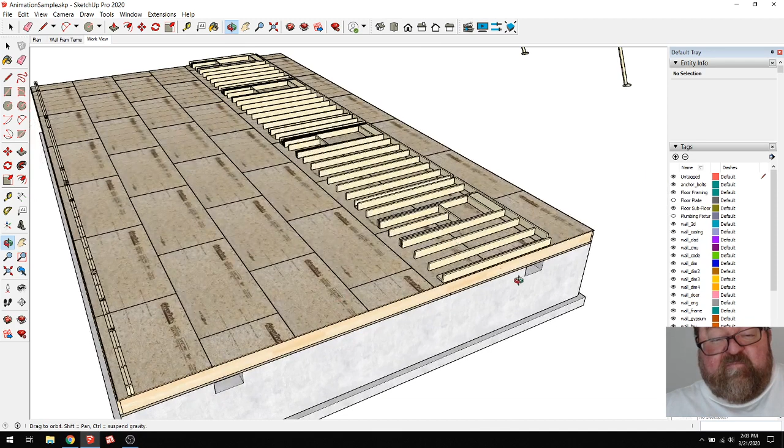To actually move objects around in SketchUp, like I'm doing in that animation, you have to have this little plug-in, or one like it, called Animator. Today was only the second time I had used it, and the first time I used it I only used it for like 10 minutes, so that's why it took me so long, obviously.

And I think in my future animation work, I'll be quicker. But anyway, my ultimate goal is to use SketchUp as a tool to teach our apprentices who sign up on our construction school.

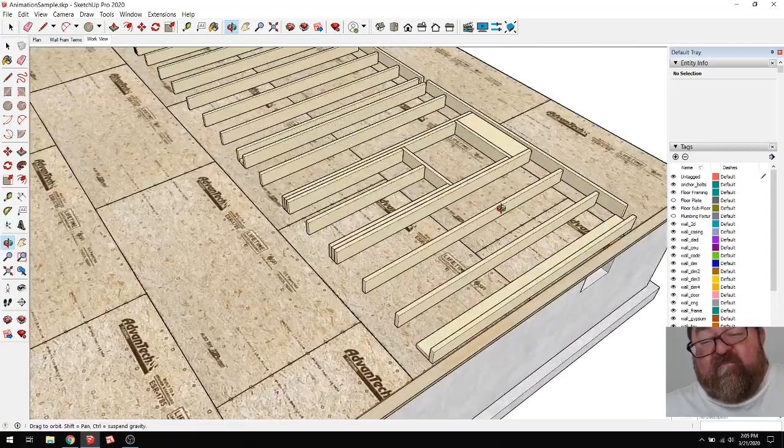But in a construction project, there's a lot more parts. When you're framing walls in a house, there's a lot more components, a lot more steps to know than there would be putting this together. I'm sure they don't want me making it seem complicated, but the end result would be just a simple animation that would show...

I don't know why it's putting it in that folder, but anyway. What I would do is make these individual steps into individual videos, and then edit all the individual videos together to make one larger video. So anyway, that is that.